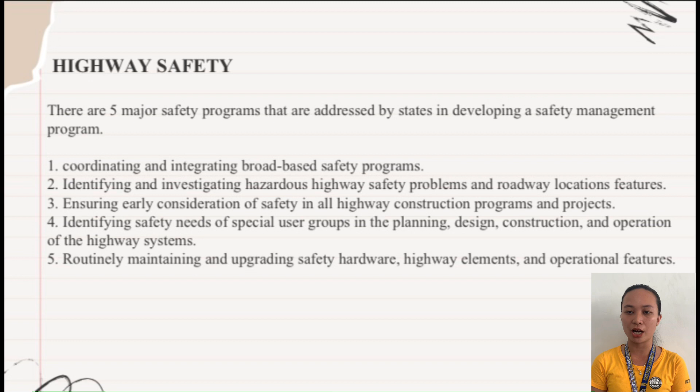There are 5 major safety programs addressed by states in developing a safety management program. One is coordinating and integrating broad-based safety programs. Two, identifying and investigating hazardous highway safety problems and roadway location features. Three, ensuring early consideration of safety in all highway construction programs and projects. Four, identifying safety needs of special user groups in planning, design, construction, and operation of highway systems. Five, routinely maintaining and upgrading safety hardware, highway elements, and operational features.

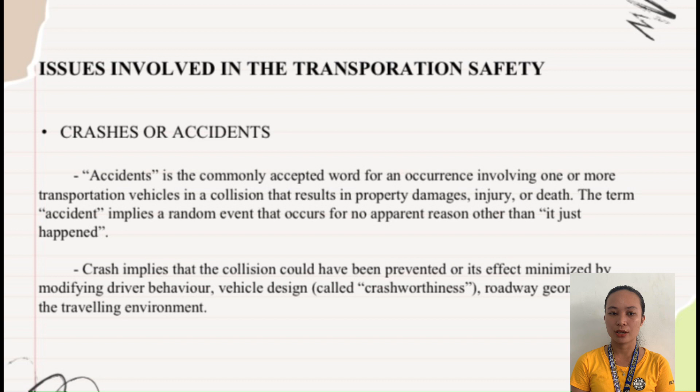Issues involved in transportation safety: crashes or accidents. Accident is the commonly accepted word for an occurrence involving one or more transportation vehicles in collision that results in property damage, injury, or death. The term accident implies a random event that occurs for no apparent reason other than it just happened. Crash implies that the collision could have been prevented or its effect minimized by modifying driver behavior, vehicle design or crashworthiness, roadway geometry, or traveling environment.

What causes transportation crashes? In some cases the answer may be simple. For example, the cause of a single car crash may be that the driver fell asleep at the wheel, crossed the highway shoulder, and crashed into a tree. In other cases the answer may be complex, involving many factors that, acting together, cause a crash to occur.

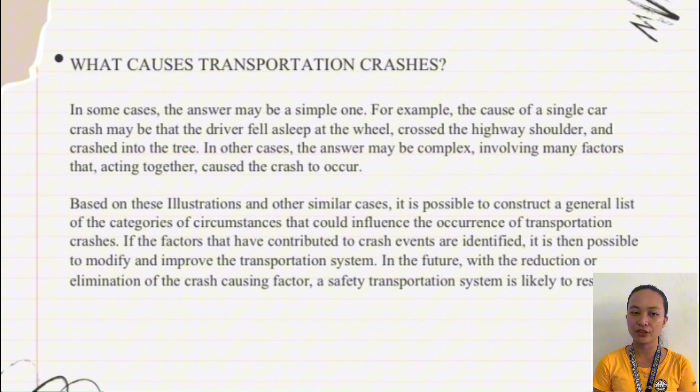Based on this illustration and other similar cases, it is possible to construct a general list of categories of circumstances that could influence the occurrence of transportation crashes. If the factors that have contributed to crash events are identified, it is then possible to modify and improve the transportation system in the future, reducing or eliminating the crash-causing factor. A safer transportation system is likely to result.

Factors involved in transportation crashes: one is human factors, driver-operator action. Two, the vehicle condition. Three, the roadway condition. Four, the environment.

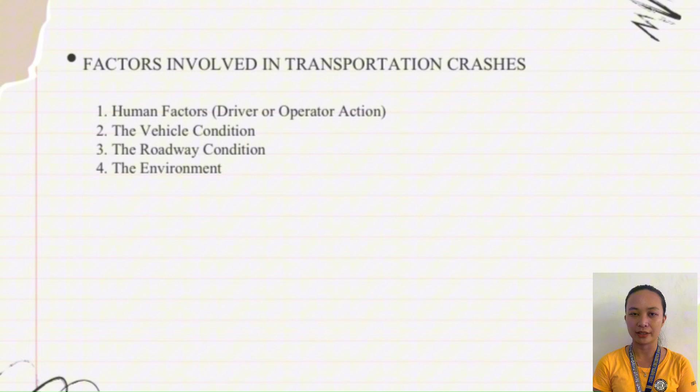Strategic highway safety plans. The purpose of this plan is to develop a process by which each state would identify its key safety needs, such that investment decisions can be made that will result in significant reduction of highway fatalities and serious injuries on public roads.

Suggested activities that could be included in these plans are: first, gain leadership support and initiative. Next, identify a champion. Next, initiate the development process. Next, gather data. And after gathering the data, it will be analyzed. Next, establish a working group.

Next, bring safety partners together. Next, adopt a strategic goal. Next, identify key emphasis areas to form task groups. Next, identify strategies and countermeasures. And last, determine priorities for implementation.

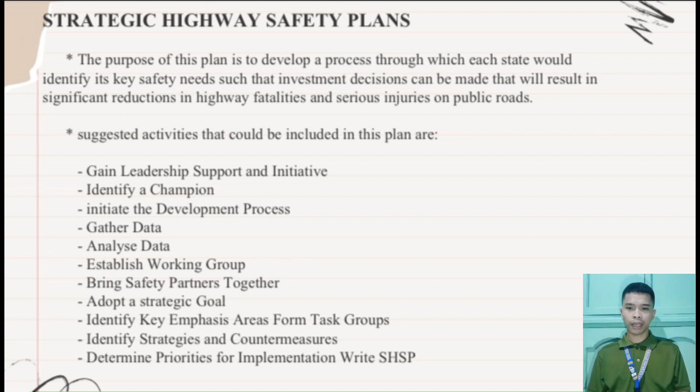SHSP, Highway Safety Improvement Program at the process level. Planning component: the planning component of the HSIP consists of 4 processes as shown in the figure. These are: first, collecting and maintaining data. Second, identifying hazardous locations and elements. Third, conducting engineering studies. And lastly, establishing project priorities.

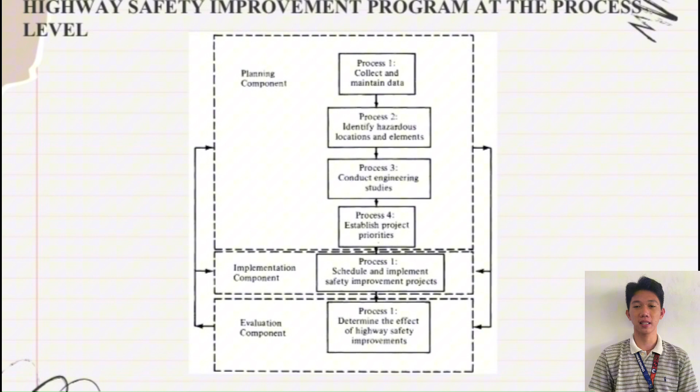The previous figure shows that the information obtained under the planning component serves as input to the two other components, and that results obtained from the evaluation component may also serve as input to the planning component. In the implementation and evaluation components: implementation involves scheduling selected projects and implementing the highway safety improvements selected. The evaluation component involves determining the effect of the highway safety improvement. This involves collecting data for a period after implementation of the improvement to determine whether anticipated benefits actually occurred.

Effectiveness of safety design features. There are different crash types: collision with trees in hazardous locations, head-on collisions, unsignalized intersection collisions, collisions on horizontal curves, collisions involving pedestrians, and lastly, collisions at signalized intersections.

There are also objectives and strategies for collisions with trees in hazardous locations: develop, revise, and implement guidelines to prevent placing trees in hazardous locations. Develop mowing and vegetation control guidelines. Remove trees in hazardous locations. Shield motorists from striking trees. Modify the roadside clear zone in the vicinity of trees. And delineate trees in hazardous locations.

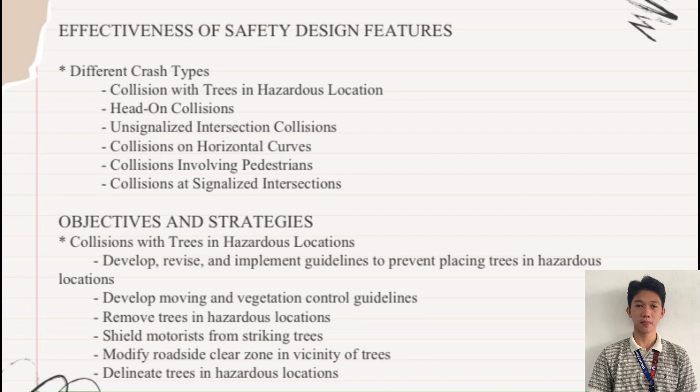For head-on collisions, install centerline rumble strips for two-lane roads. Install profile thermoplastic strips for center lines. Improve wider cross-sections for two-lane roads. Provide center two-way left turn lanes for 4 and 2-lane roads.

Relocate two-lane roads with lane and shoulder to include a narrow buffer median. Use alternating passing lanes of 4-lane sections at key locations. Lastly, install median barriers for narrow width medians on multi-lane roads.

For unsignalized intersection collisions, implement driveway closures or relocations. Implement driveway turn restrictions. Provide left or right turn lanes at intersections. Provide offset left turn lanes at intersections. Provide right and left turn acceleration lanes at divided highway intersections.

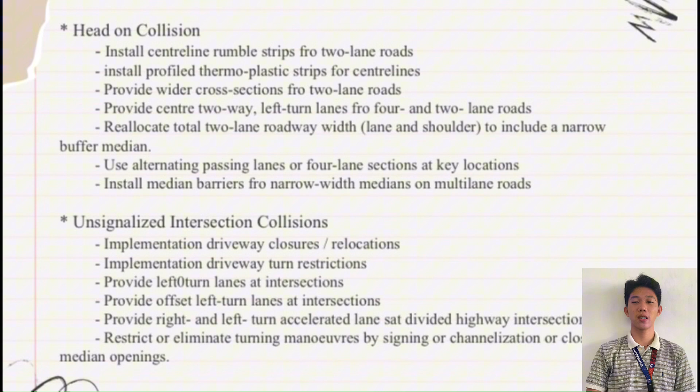Restrict or eliminate turning maneuvers by signing, channelization, or closing median openings. Clear sight triangles on stop or yield intersections. Clear sight triangles in the median of divided highways. Lastly, change horizontal and/or vertical alignment of approaches to provide more sight distance.

For collisions on horizontal curves, we must provide advance warning of unexpected changes in horizontal curves. Enhance delineation along the curve. Install shoulder and centerline rumble strips. Provide skid-resistant pavement surfaces. Improve or restore super elevation. Widen roadways. Modify horizontal alignment.

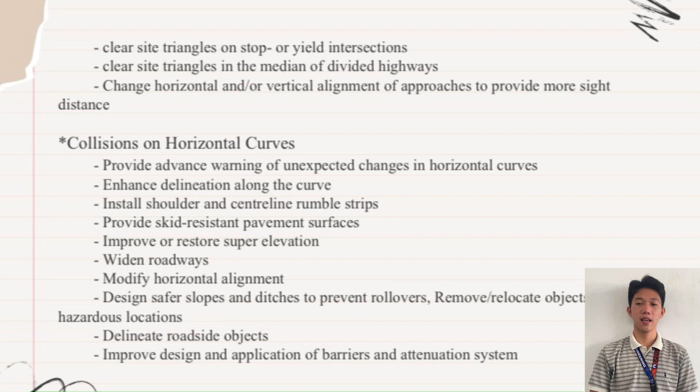Design safer slopes and ditches to prevent rollovers. Relocate objects in hazardous locations. Delineate roadside objects. Improve design and application of barriers and attenuation systems.

For collisions involving pedestrians, we must also provide sidewalks, walkways, and curb ramps. Install or upgrade traffic and pedestrian refuge islands and raised medians. Install or upgrade traffic and pedestrian signals. Provide crosswalk enhancements and signals to alert motorists that pedestrians are crossing.

Eliminate screening by physical objects. Implement road narrowing measures. Install traffic calming road sections. Install traffic calming intersections. For collisions at signalized intersections, employ multi-phase signal operations.

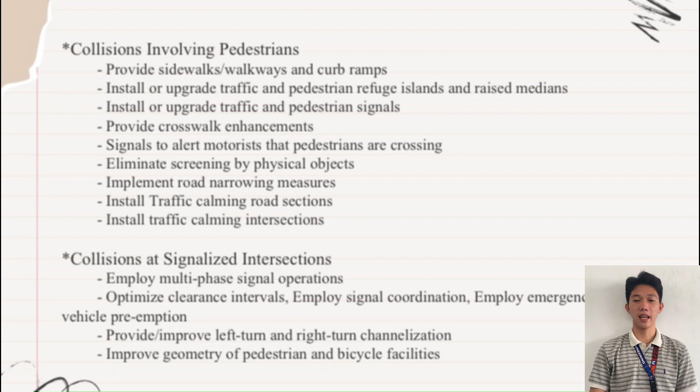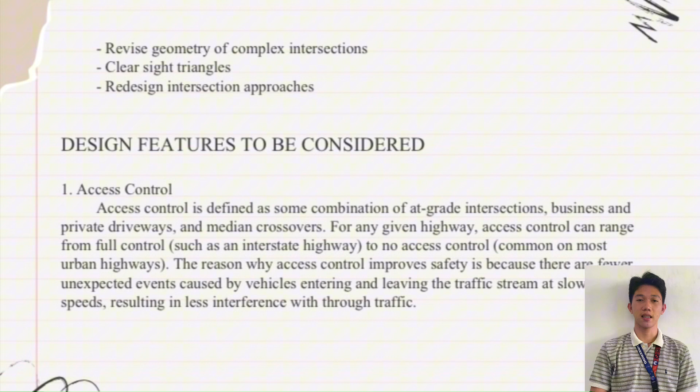Optimize clearance intervals. Employ signal coordination and emergency vehicle preemption. Provide improved left turn and right turn channelization, and improve geometry of pedestrian and bicycle facilities. Revise geometry of complex intersections, clear sight triangles, and lastly, redesign intersection approaches.

There are 5 design features to be considered. First, access control. Access control is defined as some combination of at-grade intersections, business and private driveways, and median crossovers. For any given highway, access control can range from full control, such as an interstate highway, to no access control,

common on most urban highways. The reason why access control improves safety is because there are fewer unexpected events caused by vehicles entering and leaving the traffic stream at lower speeds, resulting in less interference with through traffic.

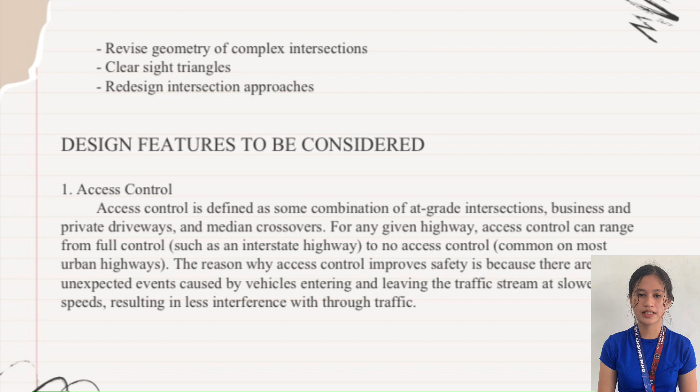Next is alignment. The geometric design of highway involves 3 elements: vertical alignment, horizontal alignment, and cross-section. Vertical alignment is influenced by consideration of terrain, cost, and safety. Horizontal alignment is influenced by design speed and super-elevation of the curve itself.

Next is cross-section. One of the most important roadway features affecting safety is the highway cross-section. Cross-section elements, including through and passing lanes, medians, and left turn lanes, may be added when a two-lane road is inadequate, possibly improving both traffic operations and safety. Safety improvements in the highway cross-section are usually focused on two-lane roads, with the exception of clear zone treatments and medians designed for multi-lane highways.

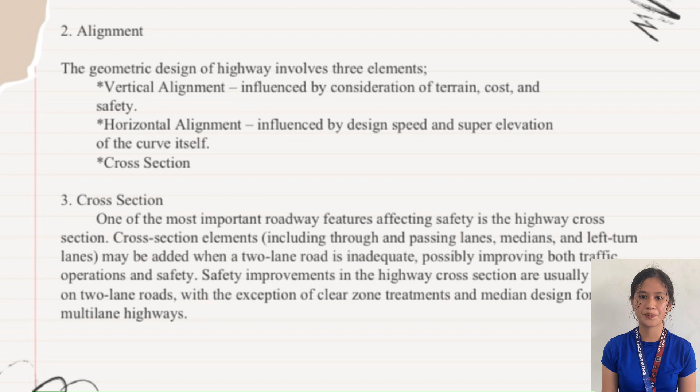Then, intersections. Intersections represent the site of most urban motor vehicle crashes in the United States. The number of crashes at intersections has increased by 14% over a 20-year period. In urban areas with high traffic volumes, intersections must accommodate a high volume of turning movements that traverse a large surface area.

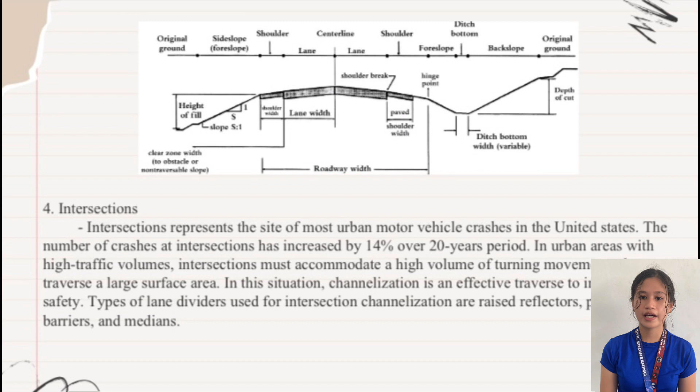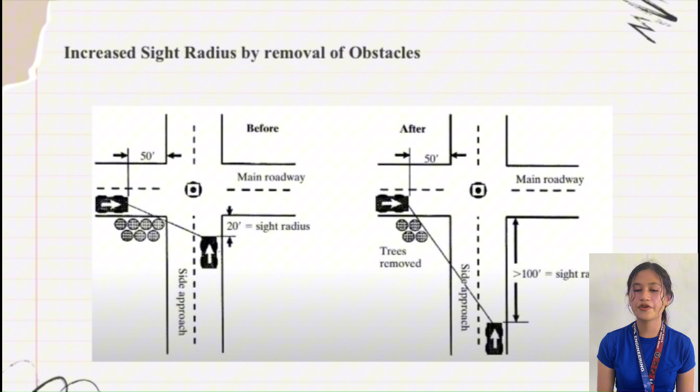Lastly, pedestrian facilities. The safety of pedestrians is of great concern to traffic and highway engineers. Efforts to reduce pedestrian and bicycle crashes involve education, enforcement, and engineering measures, as it is the case for motor vehicle crashes.

In addition, characteristics of pedestrian crashes indicate that factors related to occurrence include age, sex, alcohol use, time of day, urban and rural area type, and intersection or mid-block crossing location.

The principal geometric design elements that are used to improve pedestrian safety are sidewalks, overpasses or tunnels, raised islands, auto-free shopping streets, neighborhood traffic control to limit speeding and through traffic, curb cuts that assist wheelchair users and pedestrians with baby carriages, and then shoulders that are paved and widened.

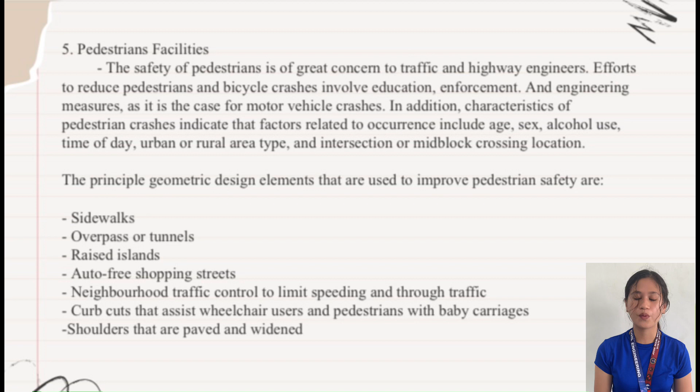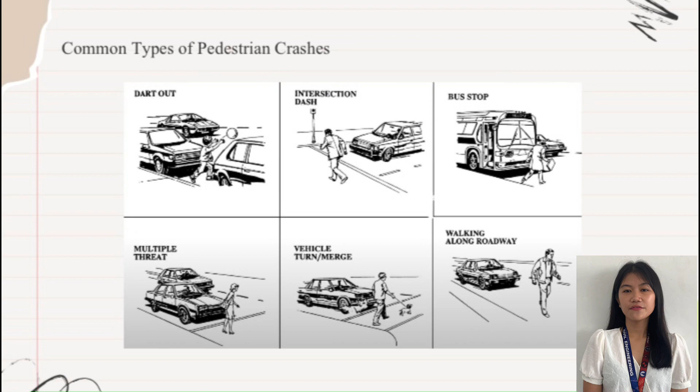Common types of pedestrian crashes. We have 6 common types. The first one is dart out. The second, intersection dash. The third, bus stop. Fourth, multiple threat. Fifth, vehicle turn or merge. And the last one is walking along roadway.

3 types of safety strategies: crash prevention, or before the crash; crash injury and fatality mitigation, or during the crash; and lastly, improving emergency response and medicine, or after the crash.

Some crash prevention strategies: commercial driver testing and licensing, drunk driving limits and enforcement, speed limits and speed limit enforcement, standardization of traffic control devices, improvement of roadway geometric designs, managing direct access to land from arterial roads, aircraft safety regulation and inspection, post-crash investigation and analysis of crash, camera enforcement of speed and red light running, and the last one, road condition and weather.

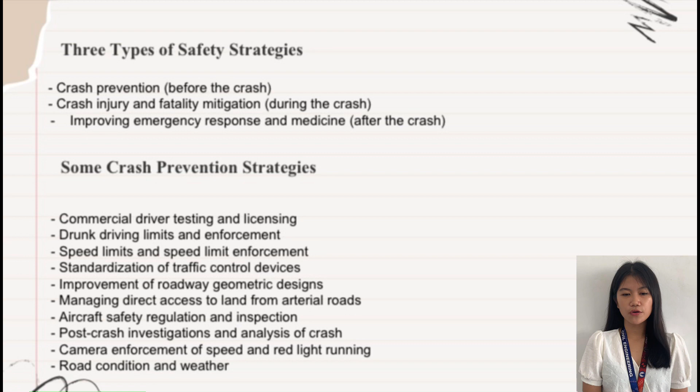Emergency response strategies: improved crash, fire, and rescue capabilities at airports; training and certification of emergency medical technicians; video surveillance of high crash locations; pre-positioning of emergency response vehicles; and mayday systems on motor vehicles.

The fundamental economics of safety. In terms of traditional economic models, safety is most likely an important part of both the demand and supply functions. The possibility of loss, injury, and death presumably enters travel demand and mode choice decisions, albeit that the profession is still hard-pressed to quantify the exact magnitude of the relationship.

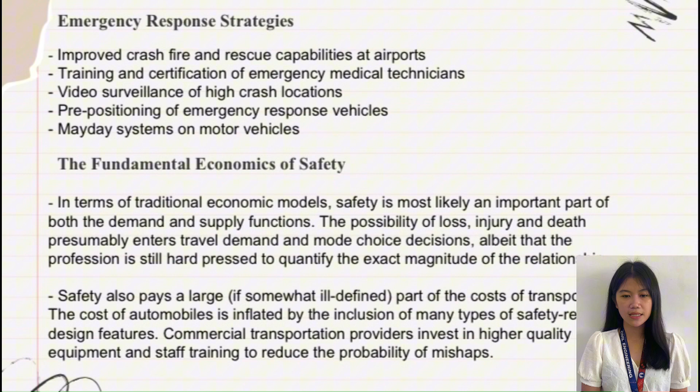Safety also plays a large, if somewhat ill-defined, part of the cost of transportation. The cost of automobiles is inflated by the inclusion of many types of safety-related design features. Commercial transportation providers invest in higher quality equipment and staff training to reduce the probability of mishaps.

The economic importance of transportation. Because of its intensive use of infrastructures, the transport sector is an important component of the economy and a common tool used for development. High-density transport infrastructure and highly connected networks are commonly associated with high levels of development. When transport systems are efficient, they provide economic and social opportunities and benefits that result in positive multiplier effects, such as better accessibility to markets, employment, and additional investments.

When transport systems are deficient in terms of capacity or reliability, they can have an economic cost, such as reduced or missed opportunities and lower quality of life. The impacts of transportation are not always intended and can have unforeseen or unintended consequences. For instance, congestion is often an unintended consequence in the provision of free or low-cost transport infrastructure to the users. However, congestion is also an indication of a growing economy where capacity and infrastructure have difficulties keeping up with the rising mobility demands.

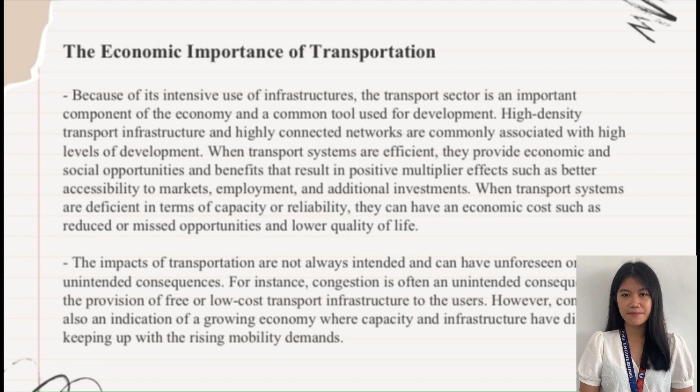Transportation impacts: the relationship between transportation and economic development is difficult to formally establish and has been debated for many years. In some circumstances, transport investment appears to be a catalyst for economic growth, while in others, economic growth puts pressures on existing transport infrastructures and incites additional investments. Transport markets and related transport infrastructure networks are key drivers in the promotion of more balanced and sustainable development, particularly by improving accessibility and the opportunities of less developed regions or disadvantaged social groups.

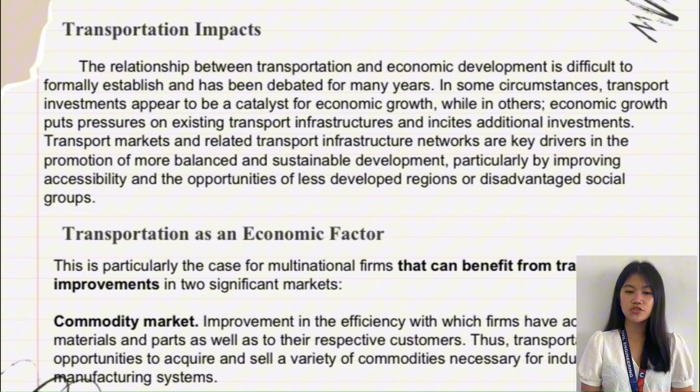Transportation as an economic factor. This is particularly the case for multinational firms that can benefit from transport improvements in two significant markets. The first one is the commodity market: improvement in the efficiency with which firms have access to raw materials and parts, as well as to their respective customers. Thus, transportation expands opportunities to acquire and sell a variety of commodities necessary for industrial and manufacturing systems.

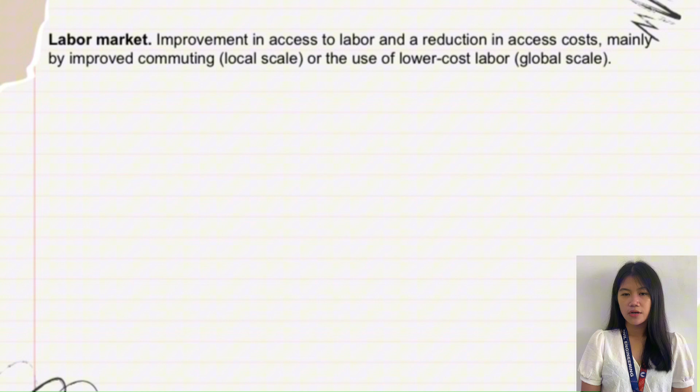And the last one is the labor market: improvement in access to labor and a reduction in access costs, mainly by improved commuting on the local scale, or those of the use of lower cost labor on the global scale. That would be all.